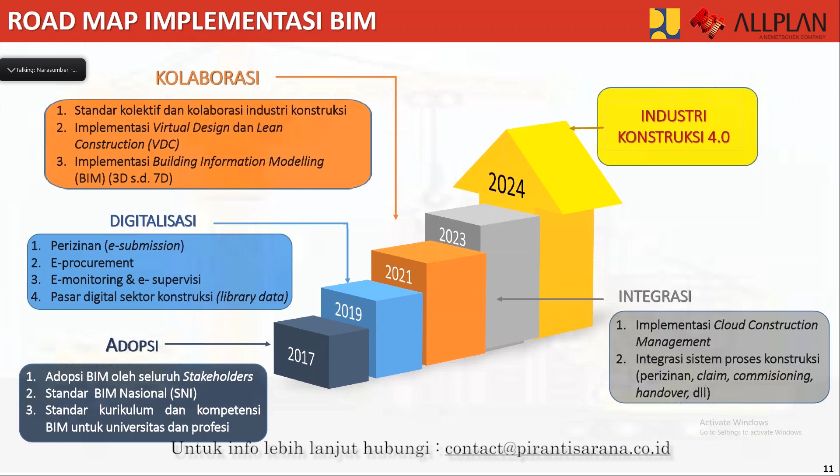Roadmap BIM seperti apa yang sudah disusun Kementerian PUPR seperti ini: 2017 adalah fase adopsi, 2019 digitalisasi, 2021 kolaborasi, 2023 integrasi, dan terakhir targetnya, cita-citanya 2024 itu industri konstruksi sudah 4.0. Walaupun ada yang sudah tercapai, ada yang masih meleset, tapi sampai saat ini sudah sangat masif sekali Kementerian PUPR khususnya untuk melakukan ini di mana-mana, kita bekerja sama, berkolaborasi, sudah menggurita kolaborasinya. Nah salah satu yang paling utama yang perlu di-highlight dan diketahui oleh Bapak Ibu serta webinar kali ini adalah ini.

Kami dari Kementerian PUPR sudah mengeluarkan Peraturan Menteri PUPR nomor 22 tahun 2018 tentang penggunaan BIM wajib diterapkan pada bangunan gedung negara. Sekali lagi diterapkan pada bangunan gedung pemerintah, negara, atau yang dibangun dengan APBN, APBD, yang bentuknya tidak sederhana atau kompleks, dengan kriteria di atas 2.000 meter persegi dan di atas 2 lantai. Ini diwajibkan untuk penyedia perencana, untuk konsultan perencana diwajibkan di lampiran 4 di peraturan ini.

Nah, keluaran-keluaran yang diminta dari peraturan ini apa saja? Ada 6 keluaran atau deliverables-nya, yaitu gambar arsitektur, struktur, MEP, landscape, RAB, dan BOQ. Jadi ada 6 itu yang diminta dari peraturan ini. Itu silakan dibaca aja di download peraturannya. Sudah diwajibkan ya Bapak Ibu.

Nanti untuk proyek jalan jembatan bentuknya gimana Pak? Itu nanti juga akan menyusul. Yang paling dekat ini, jalan jembatan akan dikeluarkan regulasinya tentang kewajiban menggunakan metode BIM di proyek jalan dan jembatan.

Bapak Ibu, untuk mempercepat implementasi BIM secara masif, kami berkolaborasi dengan banyak mitra, baik masyarakat, bisnis, industri, akademisi, maupun pemerintah pusat dan daerah. Yang paling masif belakangan ini adalah capacity building, pembinaan melalui pelatihan, webinar, seminar offline, Bimtek, TOT, dan seterusnya. Itu yang paling banyak dilakukan Kementerian PUPR untuk memasifkan BIM.

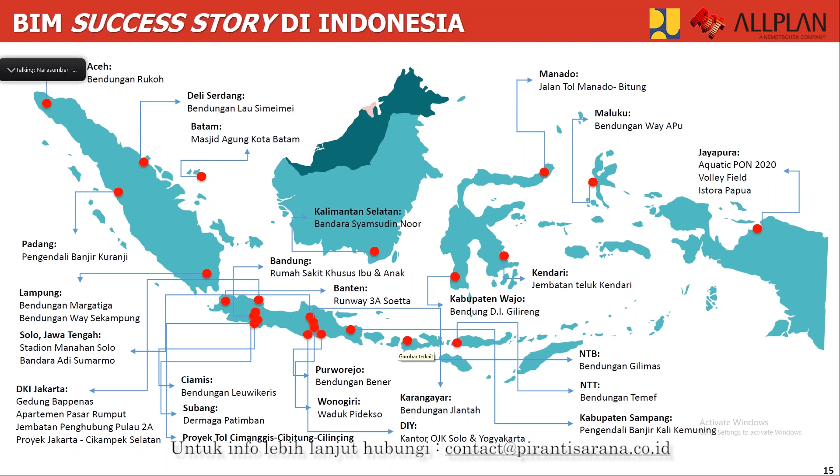Kemudian kami juga melakukan banyak kegiatan pembinaan ke seluruh Indonesia bekerja sama dengan perguruan tinggi untuk melakukan pelatihan-pelatihan terkait BIM. Seperti sudah saya sampaikan, dari laboratorium BIM targetnya 1.000 orang per tahun gratis, tapi lokasinya di Jakarta.

Untuk orang yang di luar Jakarta, silakan datang ke Jakarta, tapi ongkos dan penginapan ditanggung sendiri. Kami hanya pelatihannya gratis dan konsumsi juga dikasih selama pelatihan.

Tapi supaya bisa menjangkau lebih banyak saudara-saudara tanah air di manapun berada, kita membangun kerjasama satelit dengan perguruan tinggi. Perguruan tinggi yang punya lab BIM atau lab komputer, diinstal software BIM, kemudian orang-orang pelatihan di situ bareng-bareng dengan kami. Jadi kita menyebutnya mitra satelit BIM.

Kemudian selain perguruan tinggi, kita juga bekerja sama dengan provider, dengan badan usaha kontraktor, misalkan Adhi Karya yang punya Adhi Learning Center. Ke depan kita akan kerjasama dengan mereka, nanti peserta bisa belajar di Adhi Learning Center, instrukturnya pengajar dari Adhi Karya, kepanitiaan dan sertifikat dari Balai Penerapan Teknologi, dan guidance materi secara umum dari kami.

Jadi kita sudah banyak bekerja sama dengan macam-macam stakeholder. Kami juga bekerja sama dengan provider yang punya lab sendiri, seperti Cubicost Glodon. Nanti kita juga menitipkan orang-orang untuk belajar Cubicost Glodon di kantor atau lab mereka.

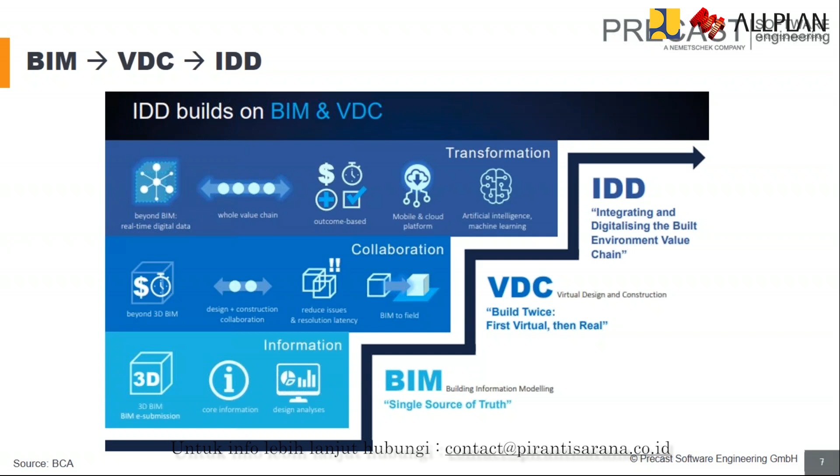For today, we would like to talk more about what is actually BIM in precast systems. Firstly, we have the advanced precast concrete system, whereby you have different principles which have to be adopted for more efficient precast design.

One very hot topic currently is PBU and PPVC, which are prefabricated bathroom units or prefabricated prefinished volumetric construction. This is slightly different from an individual precast panel, and the advantage is quite significant in terms of time saving, safety, quality, and manpower reduction.

One case is that in Singapore we have a project which should have taken 12 months to complete, but with PBU and PPVC, the time was shortened to 4 months. With most of the manufacturing happening in the factory environment, there is lesser chance of accidents on construction sites, and in the factory environment you can control the quality better as well.

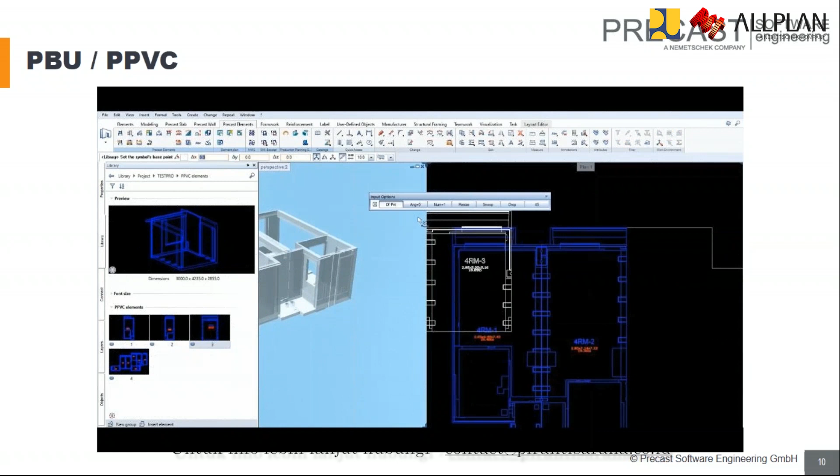And as you can see from here as well, we have multiple different views from 3D to 2D, and I will explain it briefly again later on how this actually helps people to use our software easier and learn faster as well.

So PPVC is actually quite popular in Singapore, and the government is also pushing very hard for this initiative. And for design wise, I think it will be easier because ideally all the components should be standardized more or less. So you can see all the details, and my colleague will demonstrate to you on the interface later.

Another thing that we stand for is actually open BIM. I think this is also one of the hot topics in the industry, because no solution on the market can do every single task. But for precast software engineering, I think we encompass more or less most of the stages in the precast project workflow. So with an open BIM platform, we use the IFC model to achieve interoperability with other softwares, including the more popular ones like Revit, etc.

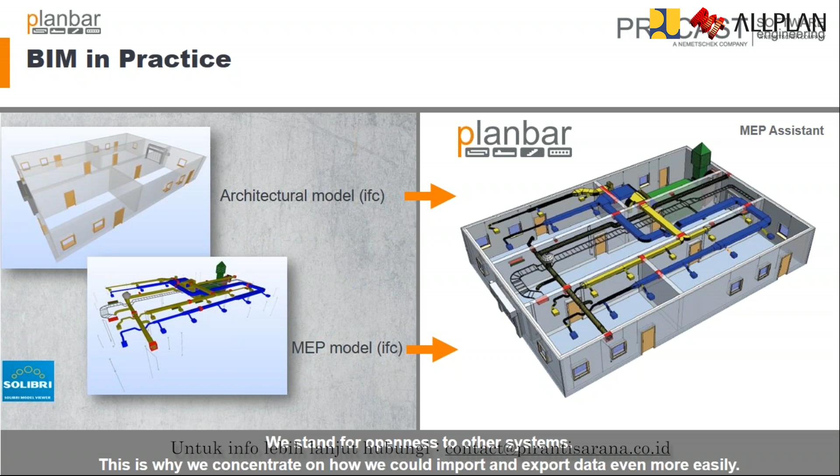So this is maybe a sneak preview of how we import IFC data into our precast model. You can see we just drag the MEP model inside this file, and we can select what kind of openings that we want through this very simple list. Then you load these fixtures or installations onto this precast model, and all this will be done automatically in a very short period of time.

So for this whole video, around 1 minute, we can actually import the MEP model, create openings and fixtures, then create a shop drawing directly from this. And what's more is that we can actually use the data to send to machineries for production. So you can see that all these shop drawings are actually completed just like that. And my colleague will actually show you how easy it is to create and change shop drawings afterwards.

And why we are so integrated - planning is one of our philosophies when we created our software. So we want to make sure all these project workflows run in a very smooth way so that we minimize the information loss from calculation to design to work preparation to production to data and report, and lastly to information management even on a mobile platform.

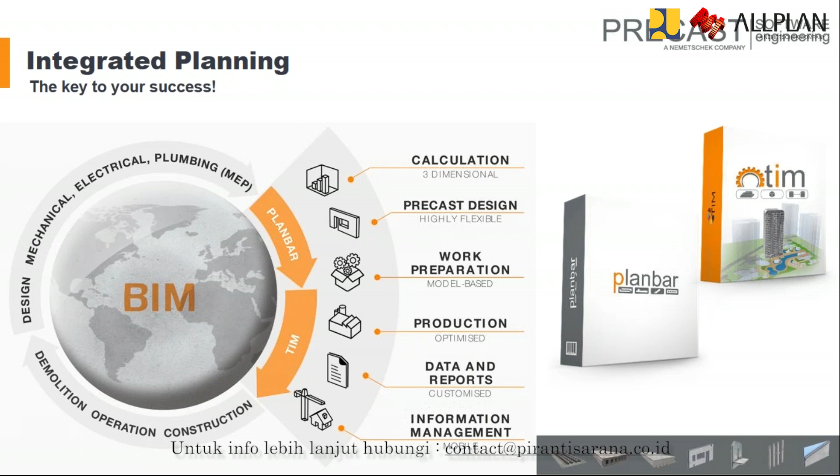And other than that, we also stand for open BIM. So this is actually the benefits that we have with MEP Assistant and IFC Assistant to reduce this data loss when you are doing your precast design.

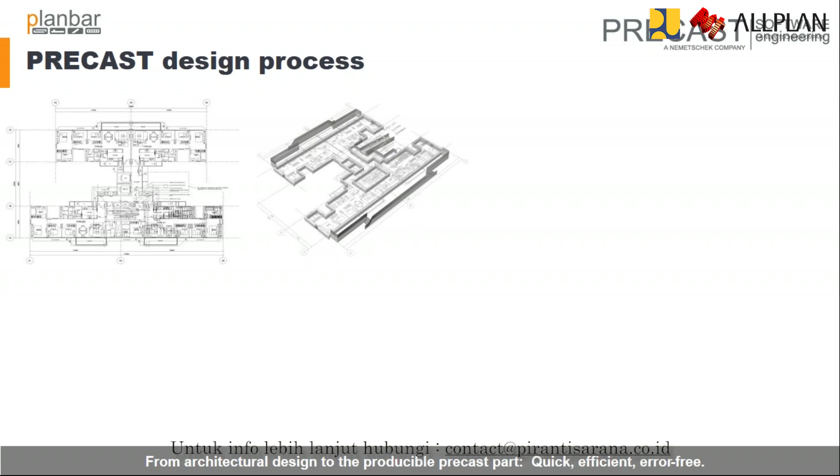The whole process is actually quite simple if you know AutoCAD, for example. So from 2D, you can create a 3D model for the whole, then you can create shop drawings in a very quick, efficient, and error-free way. I think a lot of people, when they create shop drawings or adopt BIM, they do the shop drawing first, then afterwards create a 3D model, which is actually counterintuitive if you think about it.

These are also some of the capabilities that we have. We have a database for some of these more common connections, or you can actually download these connections from the supplier's website and incorporate them into our PLANBAR solution.

Because BIM will consume a lot of computing power, if you think that one precast element may be 5 or 6 megabytes, for example, and when you have 1,000 or 2,000 precast parts in the whole project, and you have over 6 or 10 projects, all this data becomes unmanageable, right?

So we also continuously improve our solution to make it faster, so that it will not consume so much computing power. We also came out with innovative ways to identify similar precast elements in the project, and we group them together to manage them together. So you can change one precast element, and if they are the same, it can be applied to the rest of similar precast elements as well. It will be synchronized and updated automatically, and it will help you to manage this project better as well.

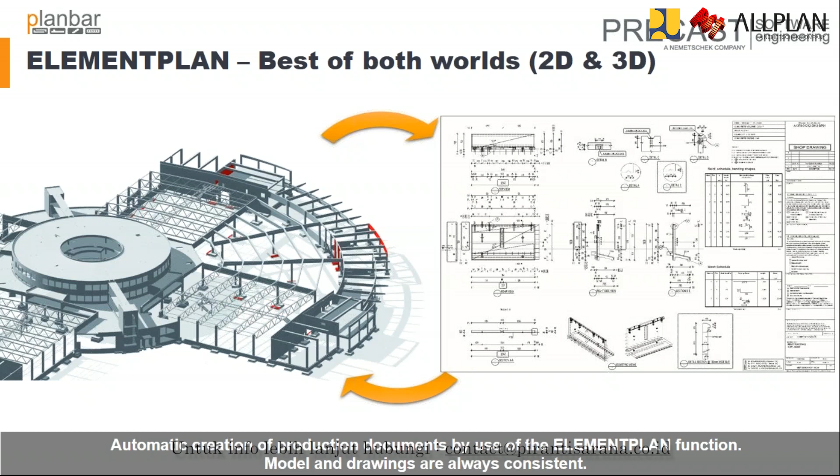The next pain point that we see a lot from BIM modelers is rebar detailing. There are a lot of standards, British standard, European standards, etc., and you have to make sure this rebar is actually compliant with these standards. You have all these different openings, etc., and it would be very tedious to put in one by one.

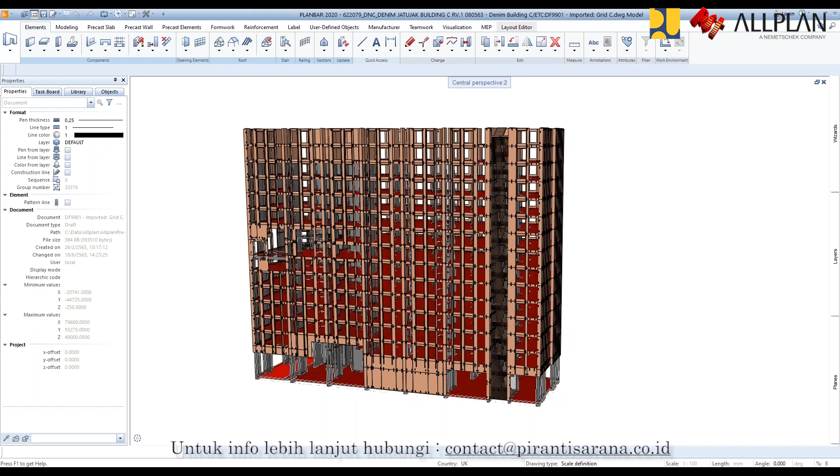Okay, so if you want to make facade wall elements, you need to create the architecture wall first in PLANBAR. I want to create a wall in this area, so let's start with architecture wall. Okay, I just make one wall here with 10 centimeter thickness.

Okay, we have a wall here. From architecture wall, we change architecture wall to the precast wall. We got it already, precast wall.

So in the design window, you can change or input any value that you want to show in your layout. For example, right now the precast type is type LG1, but I want to change it to type LGA. You just type it in the box of the additional attribute, and then you will get the result like this.

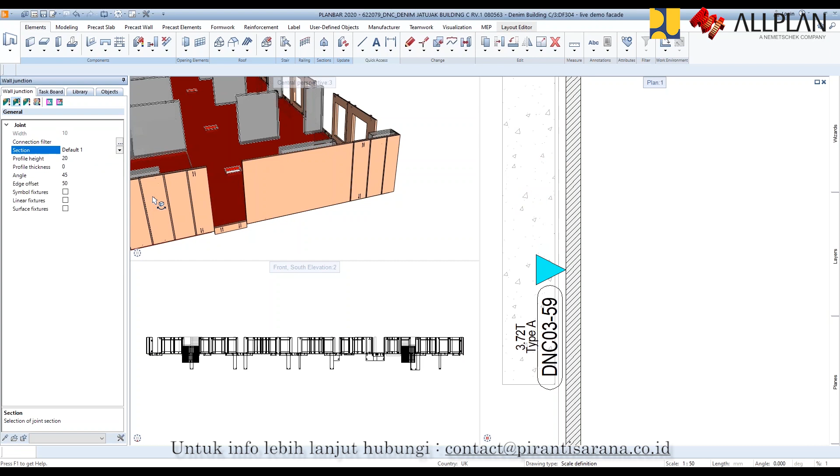So after you have done the design of the precast wall elements, you can use the connections from the design to make a wall segmentation. From the wall segmentation, you just click on the precast wall, and then you can choose the connection that you want to have. And here, yes. And then one more, I want to make a wall segmentation here. Just click on that.

And now you have a new wall with the new name, and of course you can see some information about the weight of each precast wall. It's 1.85 ton right now at the moment.

So from here you can create reinforcement by using basic reinforcement and select precast wall, and in a few seconds you will get the reinforcement. Change some setting here.

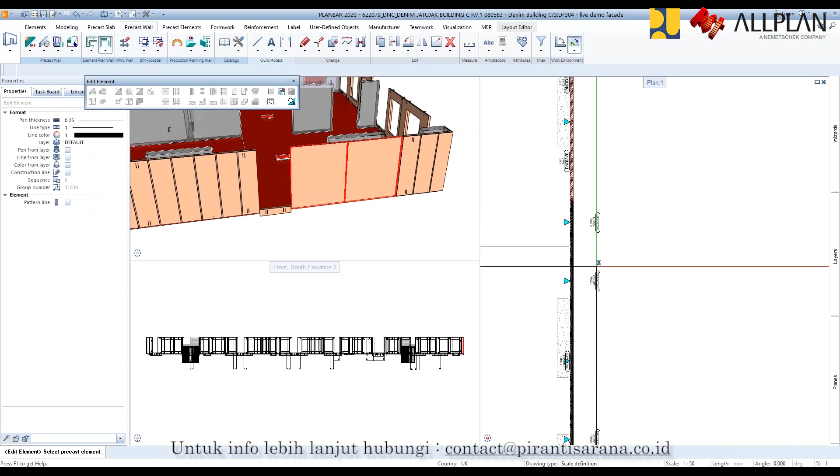And then I want to create some fixture from existing wall element. I can transfer element from existing element by select. And now you get all the objects that you want to have.

And if you want to have the shop drawing, you just click on precast wall elements, and you will get the shop drawing. But with the details of the shop drawing, my colleague Jason will explain you again how to create this shop drawing.

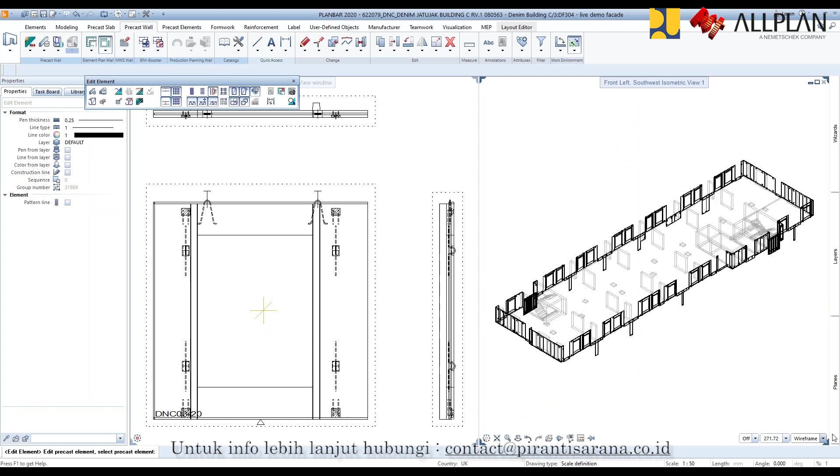And if you want to create some additional elements for your facade wall element, when you look at these facade wall elements, right now you don't have sunshade on the top of the window, right? In PLANBAR, it's very easy to do it. You just go to fixture, then select fixture and draw it. In a few minutes, you will get sunshade on the top of the window.

And of course, if you want to create a connection at the top of the wall or even bottom of the facade wall, we have the possibility to do it in a few clicks. You just select the fixture that you have and you just draw it, and now you get the top key of your facade.

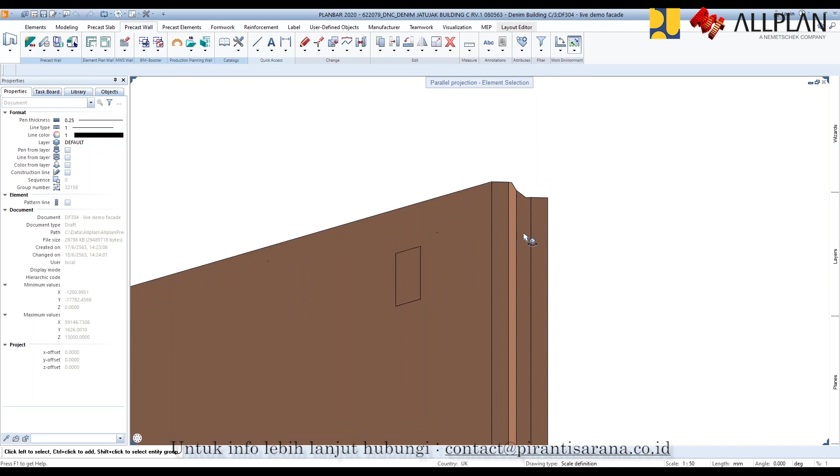And even at the bottom of your facade element. This is horizontal connection for your facade wall element at the bottom, and this is horizontal connection for your top facade elements.

But in case you want to make some opening, we also have the possibility to do it by using cutout. You just use negative and then define the size of your opening and depth of it. Right now, the moment you have the opening, and at any time you can delete it if you don't want to have it.

Okay, but for the facade elements, if you have complexity of elements, you can use our new technology that we call PythonParts. From the PythonParts, you just select the PythonPart that you have in your catalog. That's it. And then you will get all the things that you want to have now.

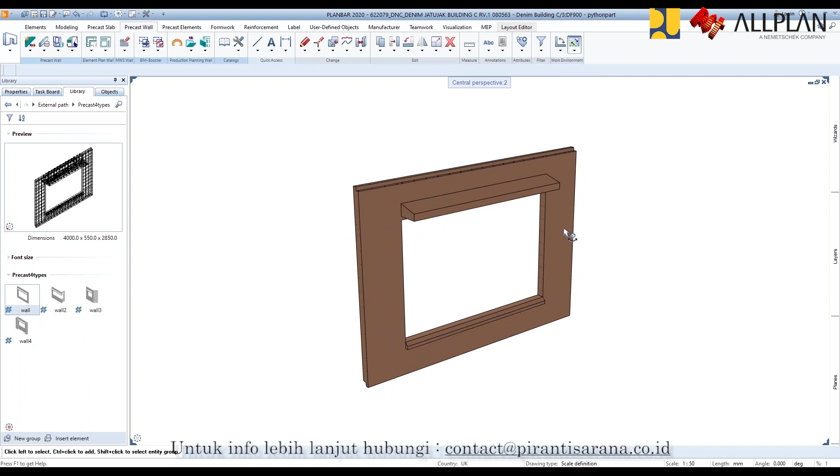But with the PythonPart, it is parametric. So parametric modeling from PythonPart is helpful for you to, let's say, resize your geometry, even the height of your facade wall elements. And of course, you can switch on or off reinforcement. And now you can see when we resize the facade wall elements, reinforcement automatically adjusts according to your configuration.

Okay, let's switch off reinforcement. And for the shading, if you don't want to have shading, you just uncheck the option in your PythonPart. And this is the result of your facade wall element.

And of course, if you want to modify horizontal connection, we also have the possibility to change the type of connection on the top and on the bottom. It depends on your design.

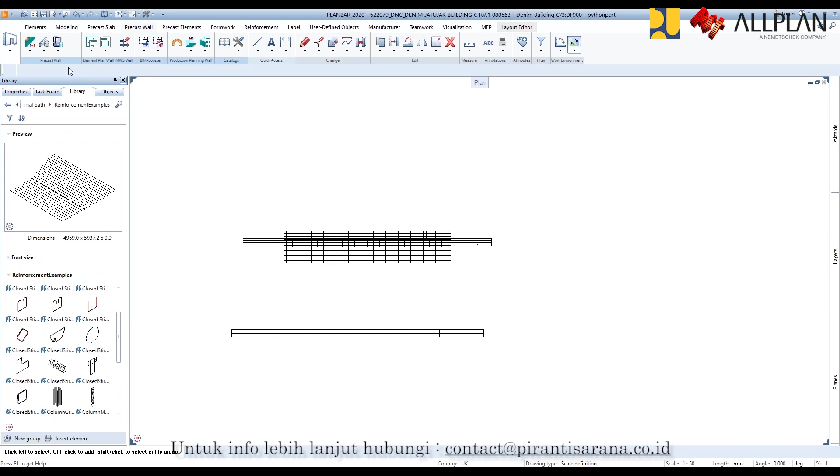Okay, and for the PythonPart, actually it's not just for the facade elements. You can use PythonPart to fulfill all your design. For example, if you want automatic reinforcement, we also have an example of PythonPart in our system for slab, for beam, for column, or for T-beam, whatever it is. You can see the example of the PythonPart in our catalog.

Okay, this is the facade wall elements. And the next one, I would like to show you how to create precast wall elements. Okay, let's start with the PDF file.

Imagine if you want to build up 3D modeling from 2D, and sometimes you don't have a DWG file from the designer or owner. Mostly you get a PDF file, right? So with PLANBAR, we are really open for the technology. We can drag and drop PDF files and then select the number of the page you want to import. Let's say number 3. From page number 3, now you get the data from PDF in PLANBAR.

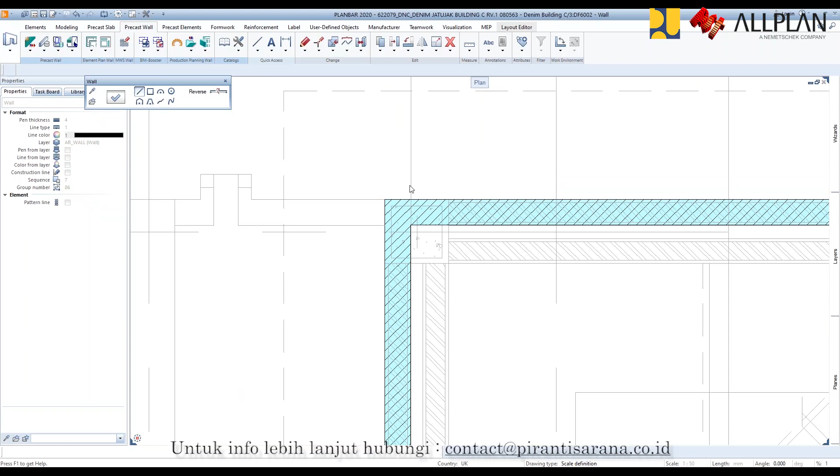So we just assign the PDF as the reference because we want to build up the wall. How do we create a wall? We just want to create the wall here and here and here and here. Sorry, is something wrong? Is that the middle?

Okay, I just move it if something is wrong, but it's not wrong right now. Let's say I have done one outer wall at the moment, and for the inner wall, of course you can draw it again, but I can mirror it from the existing wall here and here. If there are some clashes between two walls, it appears in yellow — you just delete it.

Okay, and now we have done the wall, and if you want to create some window opening in PLANBAR, it's very easy. You just go to window opening and define the height of the opening in the properties window, and then I would like to have our opening for the window here. I just click on it, and I need 1000 from the left, and width of opening 1080, height 1800. Yes, now we get the opening here.

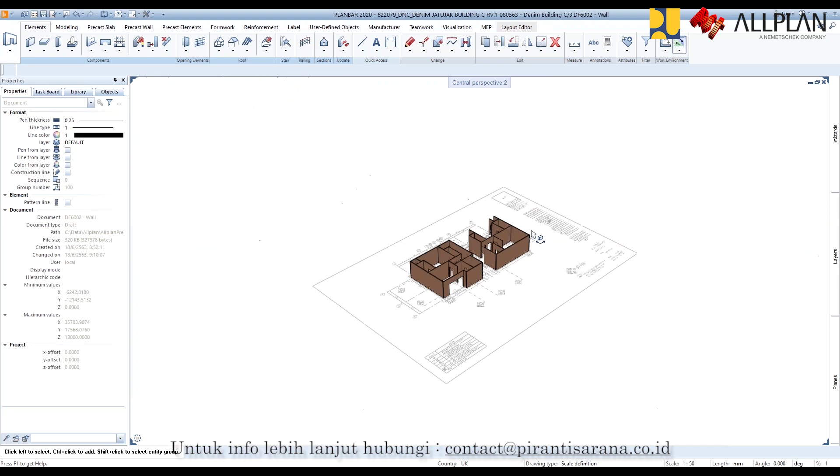Okay, let's say I have done the precast wall, and now I want to make precast wall elements. I just go to design again, and from the design I have to select precast architecture wall. In a few seconds, you will get the precast wall elements.

And you can modify the mark number. If you want to start the first mark number from 101, you just change the label mark number to 101, and then the first wall will start from 101. And of course, in additional text, you can customize any additional text, from W to WA with dash, with any symbol that you want to show. It's not fixed for the information showing now on screen — if you want to customize any information showing in the layout, you can do it on your own.

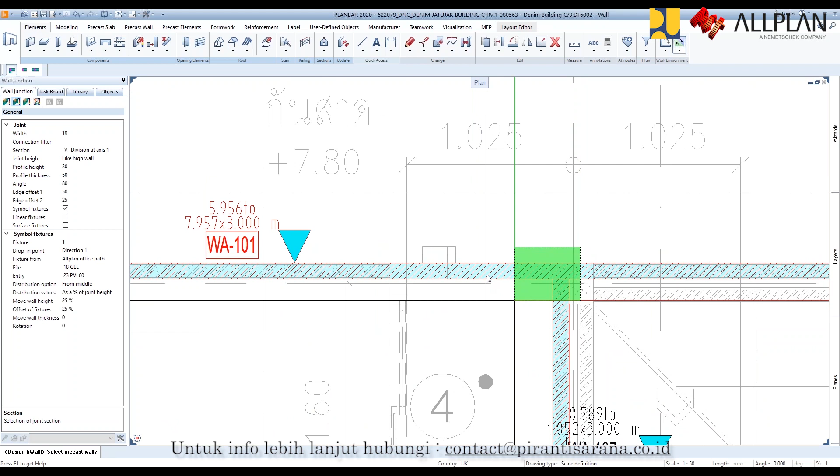And the connection here is not fixed, it's parametric. Let's say, for example, if I want to have a connection here, this is actually the three directions of connection, and you can see now we have 3 weld loops. If I want to have 4 weld loops, it's very easy because it's parametric — you just select and change the offset to 20, and now you get 4 or 5 connections, depending on your parameters.

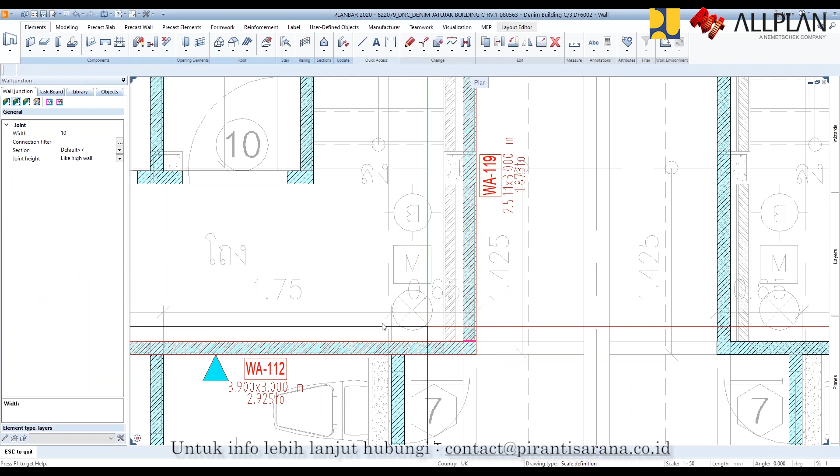Okay, and in case you want to make a wall segmentation here, you just click here, and of course you can change to this type of connection. Don't worry about your standard — for any type of connection that you have in your design, you can adapt it using PLANBAR, because our solution is really open for you to customize anything you want to do.

And then after I have done the connection for the wall, I go to basic reinforcement. From the basic reinforcement, I want to create reinforcement with items such as lifting bolts, corrugated pipe, wire mesh, or attached reinforcement. I just load my preset — from my preset, select Precast Workflow. In a few seconds, PLANBAR will generate reinforcement with any items that you need to have.

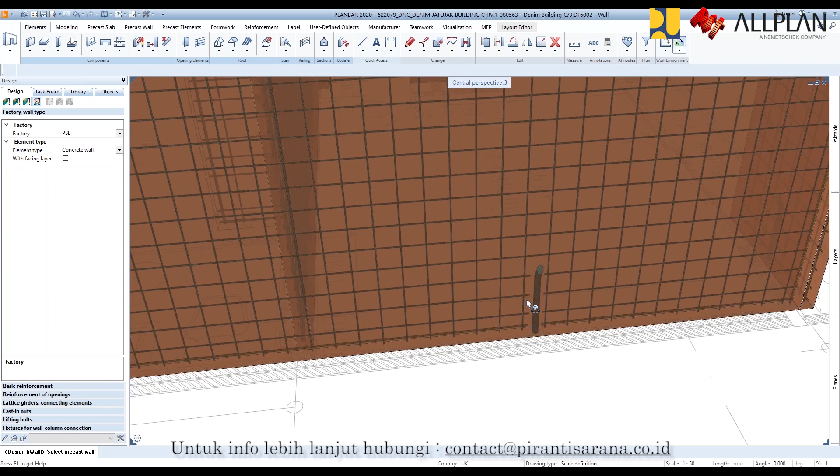You can see now, in a few seconds, you have lifting bolts, reinforcement, corrugated pipe, and of course you can set a loop. If you have a fixture or items here, the system will automatically cut reinforcement. It depends on you, we are really open for that. If you don't want to cut out reinforcement because you have a fixture or items here, we are really open for you to customize it.

Okay, what happens if I come back to the design again and go to connection, because I want to create a connection here. I create connection again, and now you can see the system will automatically create new reinforcement with the two different parts of the wall where we created a connection.

If I come back to model view again, from the model view, if I want to have some opening, now you can see what happened. The system will automatically generate extra reinforcement around the opening, and of course reinforcement also gets cut out because you have an opening here. In case you have to resize openings, you can see what happens after this.

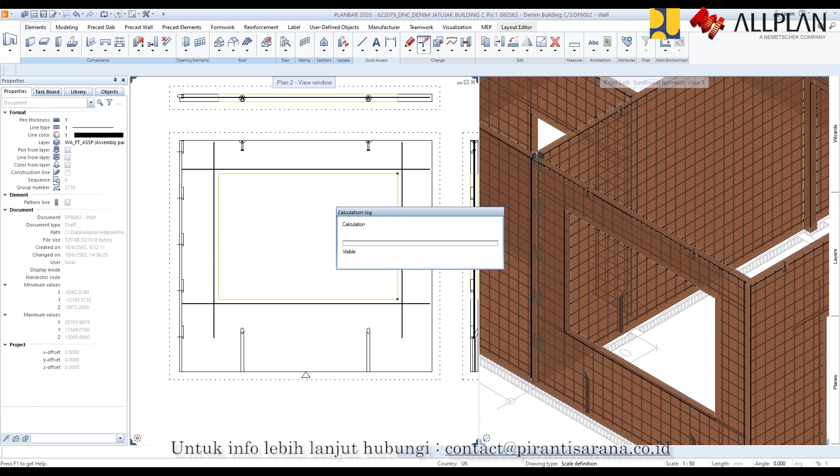The system will regenerate the position of the lifting bolt according to your CG, even the extra reinforcement already moves. Position of the connector already moves because of your condition. So for the precast wall, we have a more automatic system to help you increase your productivity.

Let's say, for example, if you want to build up the 3D modeling, we have a better tool for you to use. Okay, that's all for the precast wall. But not the last, because for the precast wall, it's not just a concrete wall. If you want to create a double wall system, sandwich wall, thermal wall, and wall consisting of n layers, we also have a solution. It's not just concrete wall available from PLANBAR at the moment. We have various types of precast wall that you can use from PLANBAR.

Okay, the next one is I would like to show you how to create a precast slab. To create a precast slab, I switch off the PDF and open just our precast wall.

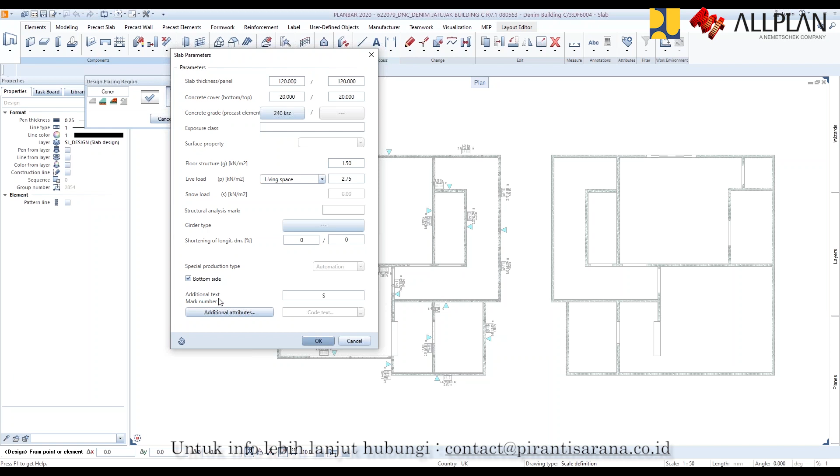When you look at the design of precast slab, we also have various types of slab: half floor, hollow core elements, pre-stressed hollow core, concrete slab, and so on. So let's start with the concrete slab. From this concrete slab, you have to define the thickness of your slab, define concrete grade, covering, and everything you want for the precast, even additional text for the mark number. And of course, you have to define connection or connecting between elements.

In case you have bend bars, like the joints between elements, you can also predefine them at this window. Okay, let's start with the basic slab. For the basic slab, I just click on this area, and now you can see we have a slab already. When I say okay, you will get all the things that you want to have.

For example, connect joints between elements, lifting bolt for the slab, and reinforcement. Now you can see on this side there is no joint because this is the end face, for the wall. If you want to modify it, you just select this side, and from here you can define a joint. When I say okay, now we have a joint here.

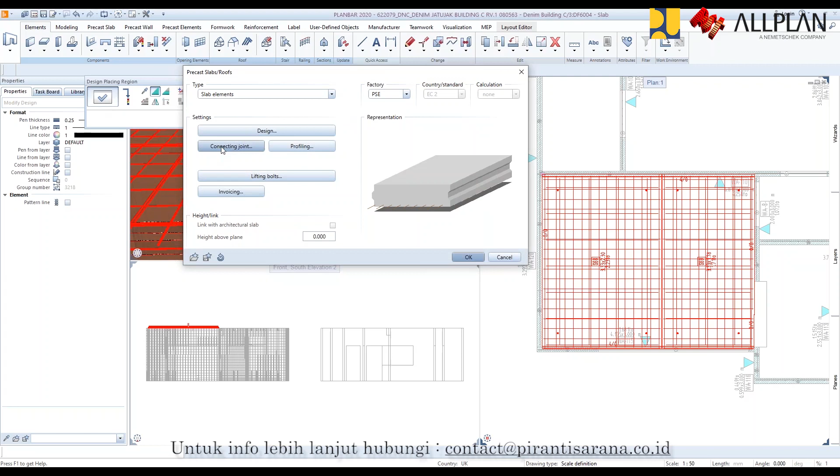If you want to have a different shape for the connection, our solution is also available for you. You can choose whichever is fine for you, but don't forget to assign any value for any bending shape, otherwise you will not get any result.

And when you're asking about end connection on the left, on the right, and on the longitudinal side, you can also have it. I just go to design again, and from the design I go to bar projection. From the bar projection, I load the setting for the bar connection, and then I say OK. Now you can get bar connection at the end face, from the start to the end.

Okay, and if you want to modify reinforcement, you just go to design and select the reinforcement you want to change. For example, I want to change from 24/10 to 20/10, and then I just say OK. The system will update the reinforcement for you with any joint detail.

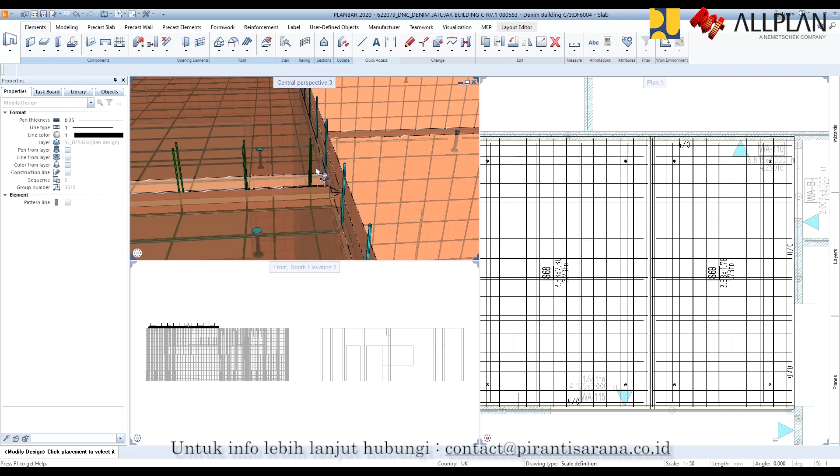And okay, when we look at slab segmentation, if you want to resize your slab segmentation, you can use this function to make a new slab segmentation. Just click on it and escape, and the system will generate a new slab segmentation.

And of course, you can modify support as well. For example, if I want to make the support longer than a wall, firstly I have to make a support separation. After I make a support separation, I click on this support, and support width should change from 4 centimeter to 20 centimeter, and then I'm OK. Now you can see the support is already extended from the beginning around 20 centimeters.

When you want to have some opening on this slab, when I want to make some opening in the middle of the slab, I just make it, and then the system will automatically cut out reinforcement, even changing everything as you preset before in your catalog, in your configuration.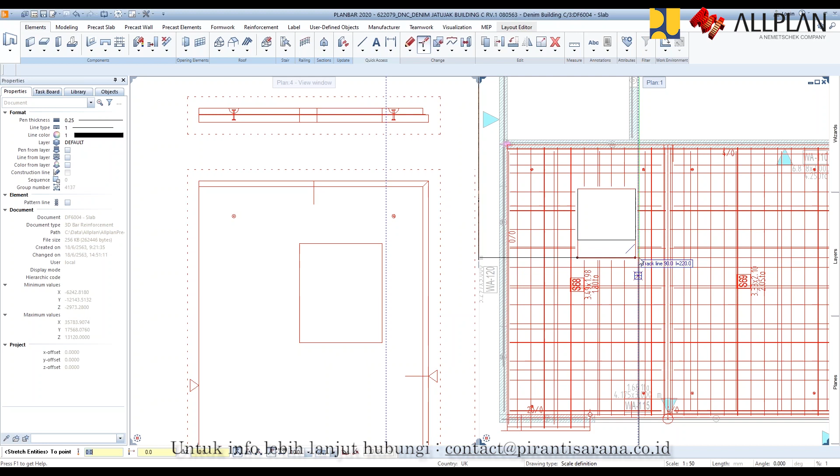And of course, extra bar openings are also available, but I'm not showing that in my setting right now. When you move something, let's say move or resize, it's also updated automatically. And you can copy an opening from this slab to this slab as well.

And if you want to resize your slab, you can do it easier by using stretch entities. And in case you want to change the thickness of the slab or whatever it is, you just go to design, change parameter, and this is the parameter for slab thickness. You can change it at any time that you want.

And on the other hand, if you are not fine with this slab direction, you just go to span direction. In the span direction now, I want to go to 0 degree. And then I go to set fixed point, make element division here, and say okay. So you can see now our solution makes it very easy to do the modifications and update everything for the slab.

For example, opening - I just delete the opening and the rest will be updated. And if you want to copy it, it's really easy actually. You just copy or mirror, and now you will get a slab like this.

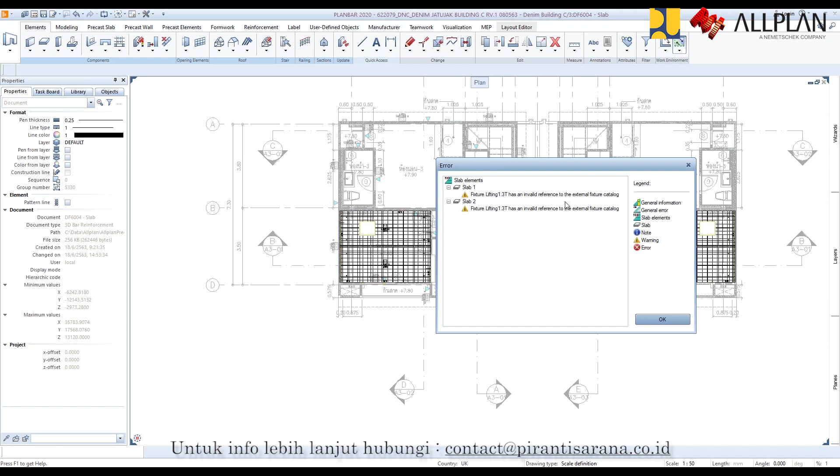If you are not fine with this, you can again change the slab segmentation easily by clicking, and of course you can change the starting point. But at the moment, width of the half set is over limitation. I just delete it and create a new slab segmentation here. Okay, that's not fine actually - let me change the span direction to here. It should be fine now, and then I say okay.

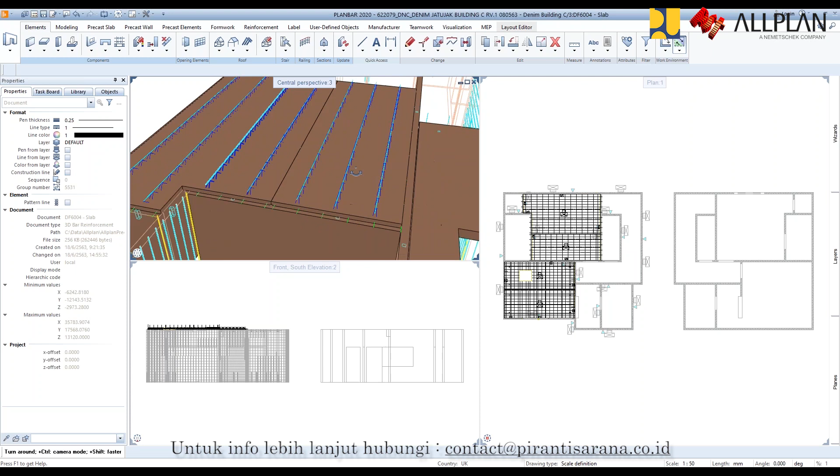And what happened? You can see now we have a half slab with wire mesh at the bottom, and on top of the wire mesh we put the girder, right? And for the girder, you have the possibility to move it manually if you want. This is after, and this is before.

Or you can go to modify design, and from here you can go to lattice girder, and lock the spacing of the girder. Let's say for example standard is 40 centimeter or maybe 60 centimeter. At the moment I need 20 or 200, because I'm working in millimeters. And then I just say okay and okay, and now this is the result of the girder.

It's the same actually as with the concrete slab. About opening - if I want to make an opening here, the system will automatically generate or cut out reinforcement with the girder. Even if you move it, it is the same. This is because of the minimum length of your girder that cannot be produced by the machine, that's why our system will not create any girder here.

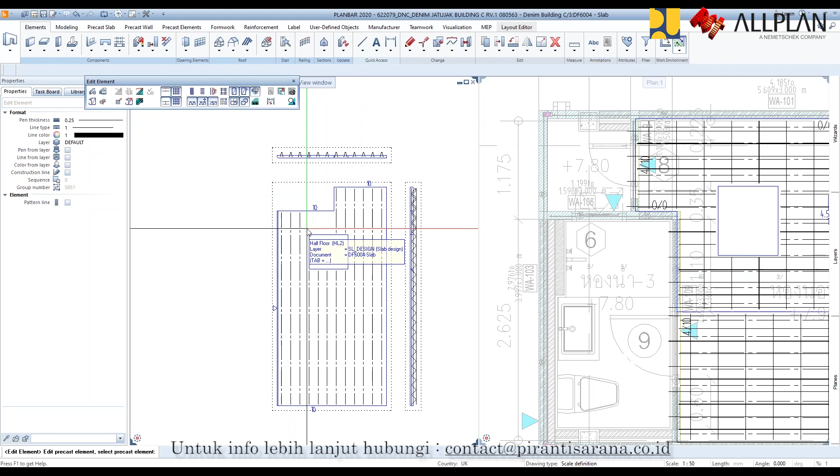But you can make a manual secondary girder by using secondary girder. But at the moment, I'm not showing any more regarding the secondary girder.

And the last one from my side at the moment is hollow core. When we talk about hollow core, normally you have machines to produce or create a hollow core slab element. With the hollow core slab elements, when you look at the type of hollow core, you can create any type of hollow core that you want to have. I will go a little bit deeper into the detail of configuration of hollow core.

If I go to hollow core, you can customize your profile of your hollow core. You just have to define parameters - let's say, for example, panel thickness, number of cores, and even the standard panel width, minimum fit panel width, and so on. So after you have done the catalog for your hollow core, to make a hollow core in 3D, it's very easy actually.

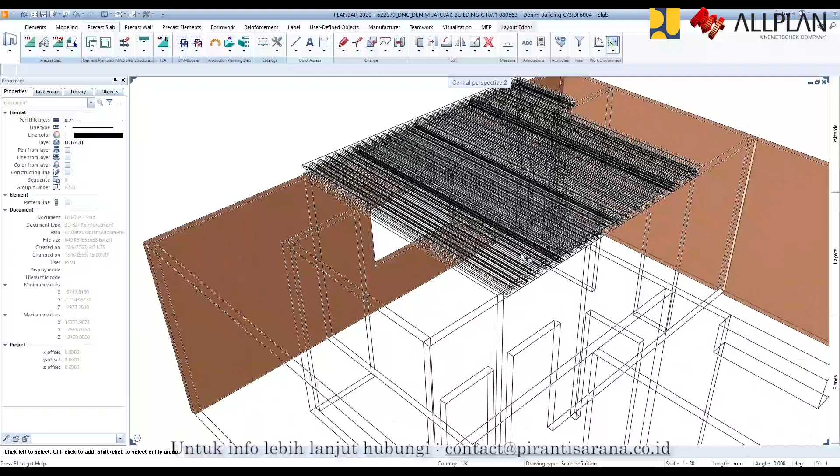It's very easy to make a hollow core system. The cutting will follow the rules or conditions of your configuration, because we don't allow you to cut your hollow core as width of the hollow core, right? But this is not a restriction of the rules, so that's why the system shows the cutting at this area.

It's the same actually with the slab elements. If you want to change span direction, just go to here and change to 0. Even the type of hollow core, you can change at any time. Connecting joints of hollow core is also available.

One more thing I want to explain for slab modules. In the slab module, we have various types of slab, but mostly people ask me how to move up or move down the position, the level of the slab. You just go to height and define it, say I want to move down my slab minus 500. I just put minus 500 here. And then if I don't want to use area detection, I just say no area detection.

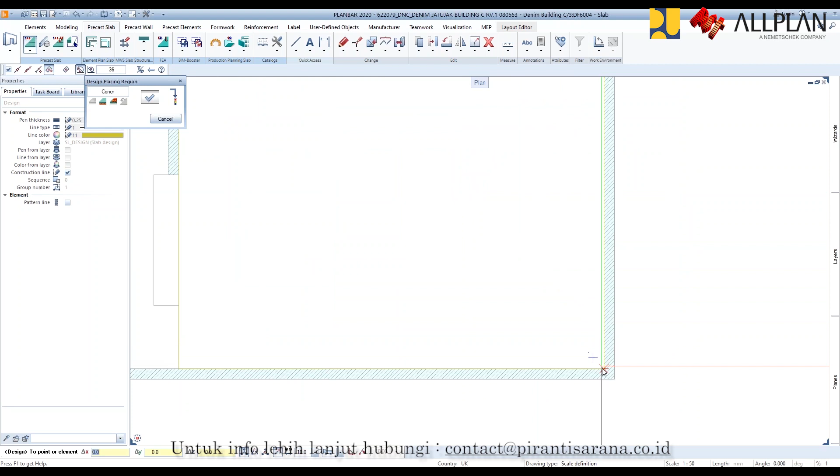And then I go to concrete slab again, and from the concrete slab I just define it. And if you don't want to have any joint, you can do that as well. You just click and say no, I don't want to have a joint here. But at the face, I need it. And now go with 20/040.

Of course, new segmentation, and this is the gap between elements. It's just 1 millimeter, I go with 10 millimeter. Whatever you want, you can set before you say okay. And then I just say okay, now you get all the thing.

Or even the lifting. In the lifting board, we have 3 options available right now: based on weight starting at the center of gravity, or based on panel length starting at outer edge. You can check by yourself how it's working.

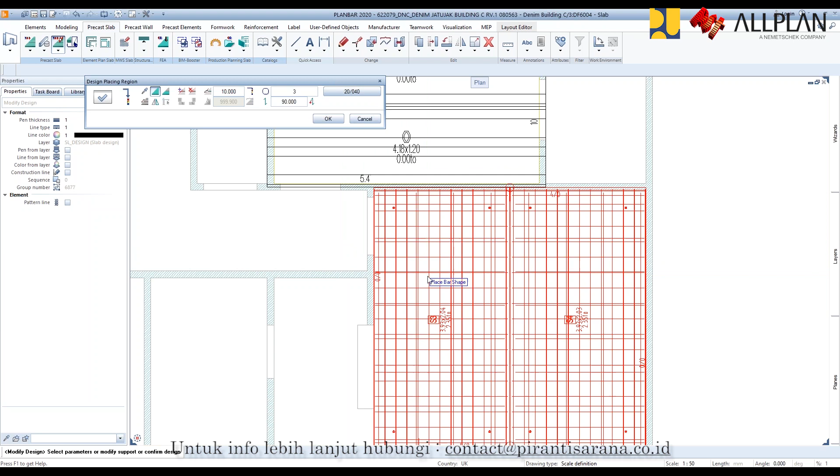Regarding slab elements, if I have more possibility to show you right now. If you want to change steel gauge, you can do it here, and you can even add more reinforcement by using attached reinforcement. You can go to longitudinal bars and crossbar.

And of course, for the shop drawing, you just click on it, and then you will get the shop drawing for the slab. But I will not extend on this anymore because my colleague Jason will take over this part. For the shop drawing, we are very flexible for you to make anything that you want to have.

Okay. So, regarding to the question, do you want to talk something to him?

Because someone is asking for automatic placement for lifting hook, if you're confident to present, then you can show it. You mean for, sorry, the question is, do you mean for wall or for slab, or for both? Okay, maybe I can show you for both. Makes sense to do.

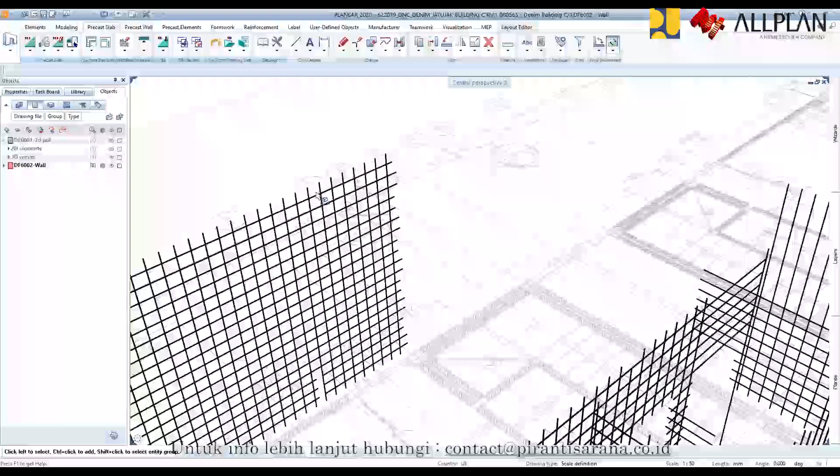I come back to wall. Now you can see this is automatic lifting bowl or lifting anchor. I have to come back to properties, to the basic reinforcement. And then in the lifting bowl, you have many possibilities to set the condition and rules to have the automatic lifting bowl.

And of course, we have automatic lifting bowl, and this is a window where you can set any parameter or condition for your lifting bowl. This is for wall.

And for slab as well, as I showed you, when you go to this, lifting bowl, we have 3 options to get or create automatic lifting bowl. We have option 1, option 2, and option 3. So for the slab and wall, we have automatic lifting bowl, and you can use this automatic system to create your lifting bowl for slab, for example.

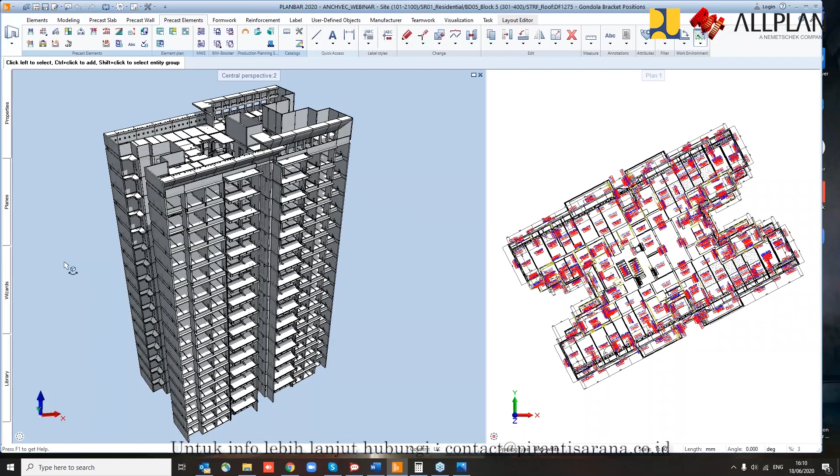So to show you more on the project, a real project, I will open a project. Just to have a background of this project, this is one block of about 10 blocks for one project. This is a project of one of the precasters in Singapore, which is Greyform Private Limited. This is actually an EC, or executive condo, type of structure, composed of 10 blocks and about 16 stories per block, plus basement, edex, and roof. So the PC elements here, as you can see, are actually all precast.

Even the simple ones, as I mentioned, simple walls. You also have, for the lift core area, the ducts and the staircase, etc. So it means the structural precast elements are actually possible to use for any shape.

So I will try to show you that, for example, on this featured roof. It's something like an irregular shape. And if I load the detail of this, then you can see that this kind of shape is really possible to do using the structural precast elements, like this one. As you can see, it's not normal, I can say it's still a complicated one because of the irregular shape.

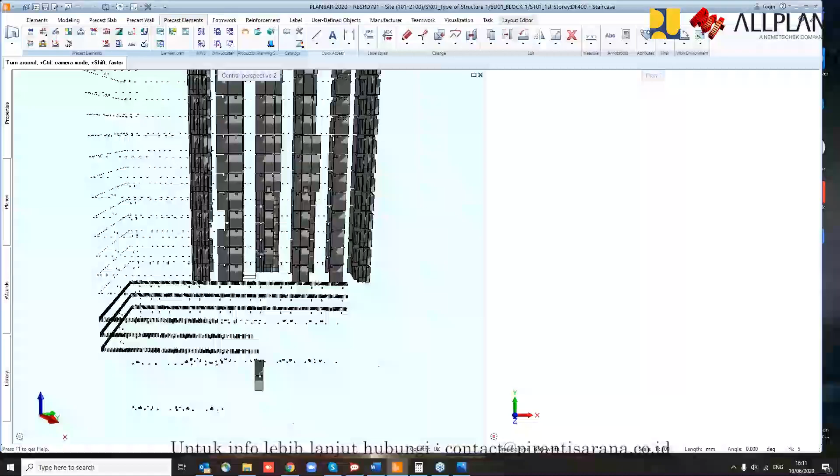The next one is another project from Greyform, wherein you can see other types or kinds of precast elements. Initially I showed you the beams and the columns. So these beams are not just ordinary beams. If we can see, the shape of this is actually a really huge precast element. Even the columns, even these core walls. So if I can just go to a certain level to show you how it looks like.

Because this one is really difficult to produce, normally they use precast elements, especially for irregular shapes. I will just load maybe level 3. By the way, this project is actually a 29-story office development with a 5-story podium consisting of a first story restaurant, second story main lobby, and a 3-story car park. So all of the elements here are actually precast also.

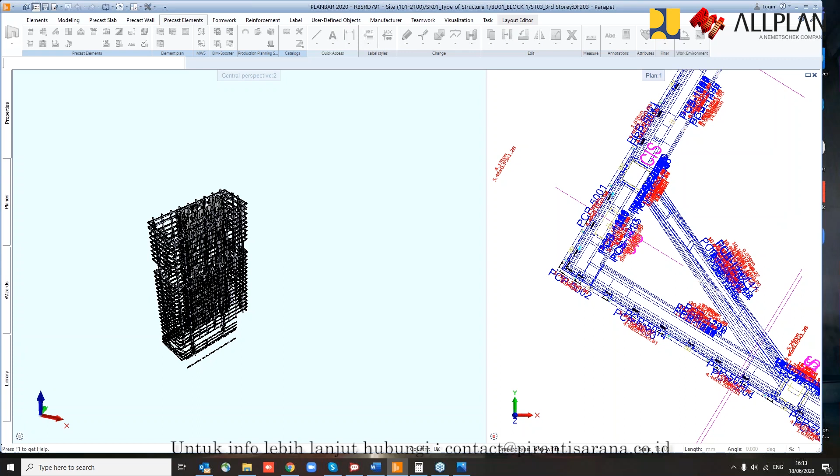So maybe I'll just open this, third story, just to have the dimension. So you can see, just to show you that when you have a huge project with a big or different type of precast elements, you can still use PLANBAR to create them as precast using the structural precast elements. As you can see, there are beams that are almost 9 meters, almost 10 meters, excluding this part. If I show you closer, so this part, it's really a big beam. This beam's depth is about 1.2 meters.

Okay, so now to show you, I will go back to my project to show you how to use the structural precast elements. So again, these are the samples. The PPVC or the PPVC PBU is this one. So how can you use the structural precast elements?

So first, you can do the same procedure as what my colleague showed. If you have a PDF, you can use the PDF to refer. But at the moment, since I will be doing just an individual element, I will just show you how to create a precast element using the structural precast module.

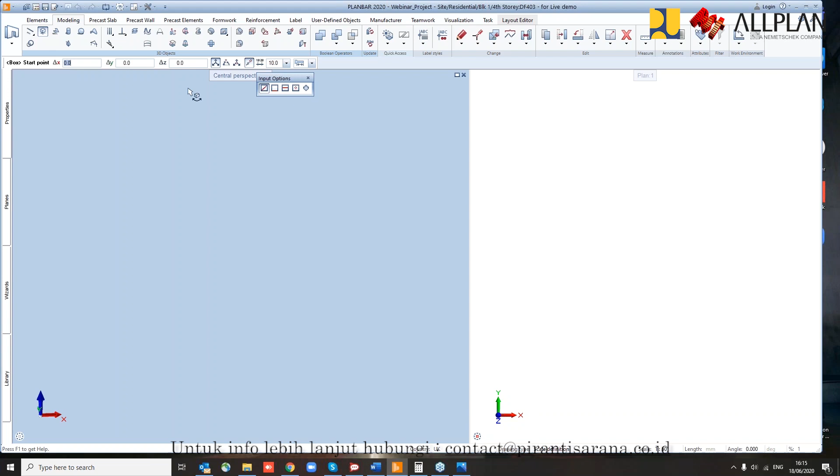First, you're just going to use this 3D modeling, and you can say I will create a 3D object to make a column. So I will specify the dimension of 1.5 by 1 meter and the height of 2.5 meters. Initially, this will be your precast element, I mean the 3D model.

To convert this as a precast element, you just have to go to this precast elements and select this icon, which is the structural precast elements. And I will just load my predefined settings. So you have this properties: a column, 3D, and then PC precast. You just have to fill in all the information here that you need, including the dimensions if you need it. So I will select the 3D element.

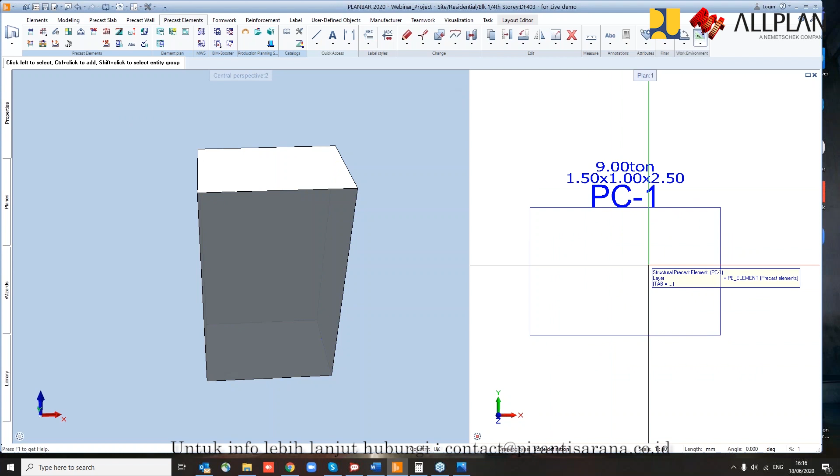Once you have this marking, it is actually a precast element already. So how are you going to cut, or how are you going to make this 3D model to be the same as per the standard? Let's say, for example, I'm going to put reinforcement.

Since this one is a precast, I can already put reinforcements. Basically, I will use first maybe the links. Then, by the way, I can go to create views or edit element, same as my colleague has done.

Or either you can also create a view by your own, so you can have it here to control more. I'm just creating different views: the top, side, and front view. So again, I'll start with placing the reinforcement.

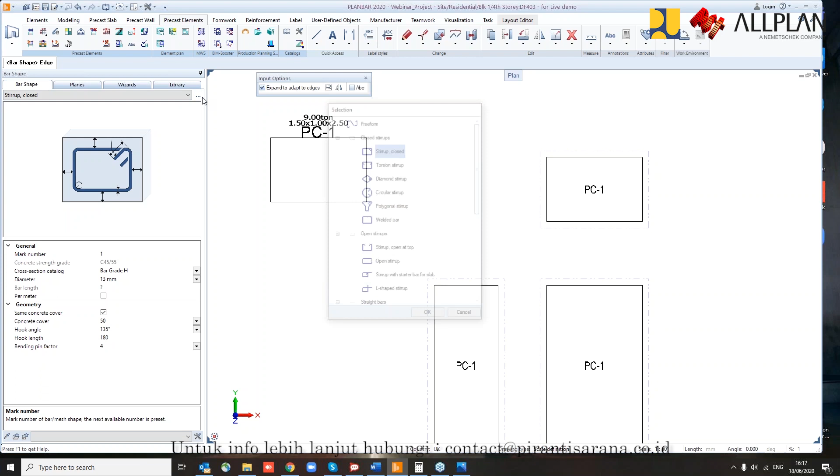Once you have created this 3D object to become a precast element, you can have this reinforcement specifying what types you're going to use or shapes. You have different shapes here. Let's say I will use first the links.

I will just load my preset and say I'm going to place bars here. As you can see, it's adapting the shape, and I can say place bar shape. As you can see, you can have the bars there. But in this case, you can still modify the spacing.

So maybe I just stretched it a little bit. You have the spacing of maybe 150. You can change from this setting, or you can predefine the spacing that you want to have. For example, I want to space from this area to have a spacing of 100.

Then another placing bar from here to here to be maybe 200. So you will have this different spacing for your links. As you can see, it's already inside.

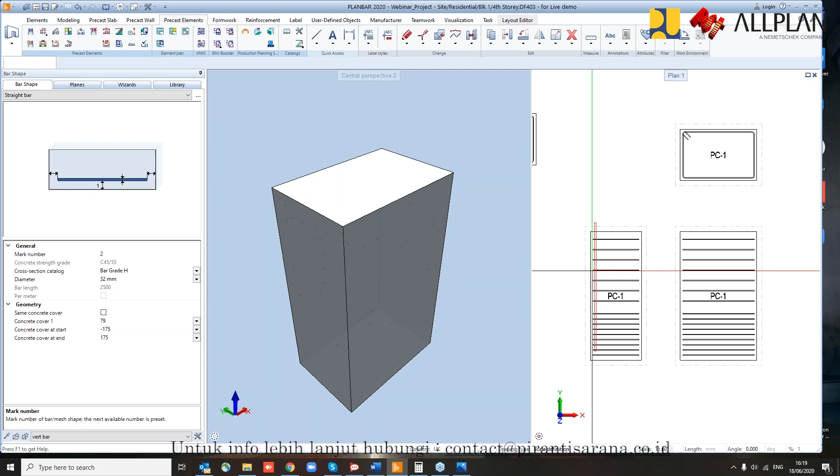Let's say, for example, the straight bar, that's for the vertical. I will just load my preset, and if you look at this, I'm going to check this one in adapting my boundary. So if I click here, I can say my place bar.

It's the same procedure as what we did in the links. I just specify from here to here, and that's what you can see from here. You have the bars there. So we just have to modify the spacing, maybe just to maximize it. As you can see, you can change the bars before you place them, the concrete covers.

So again, I can do one more time for the other side. I just close this one. Okay, again, bars. And just to show you, I will just put this 175, and this one is 175. As you can see, when you modify from these concrete covers, it's automatically adjusting from here. So this will be your guide.

So I'm going to place the same way as what we did. Let's see, from here to here again, and it placed on the other side.

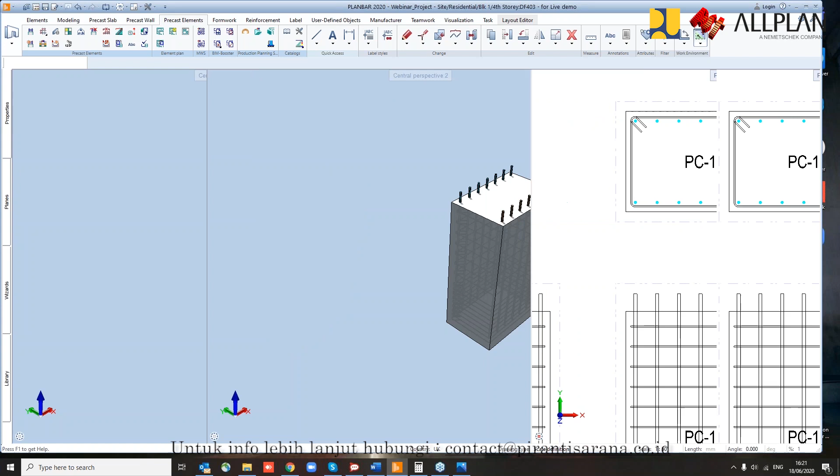So another thing, if you want to put more bars, we can complete this one. Maybe you can just do a mirror since they're already placed. So we can just say mirror from here to here, and maybe this here to here. As you can see from the model, it's already updating.

So the next thing is, actually you can place all different kinds of bars. So maybe we can try to put also the hooks. I just use a form here with a straight bar with hooks. And then you just predefine what will be the setting.

So maybe I can just place my hooks instead of expand to adapt edges. I will just remove that and select just this part and this part. As you can see, I already have the hook shape. You can still modify this if you want to have a longer hook length.

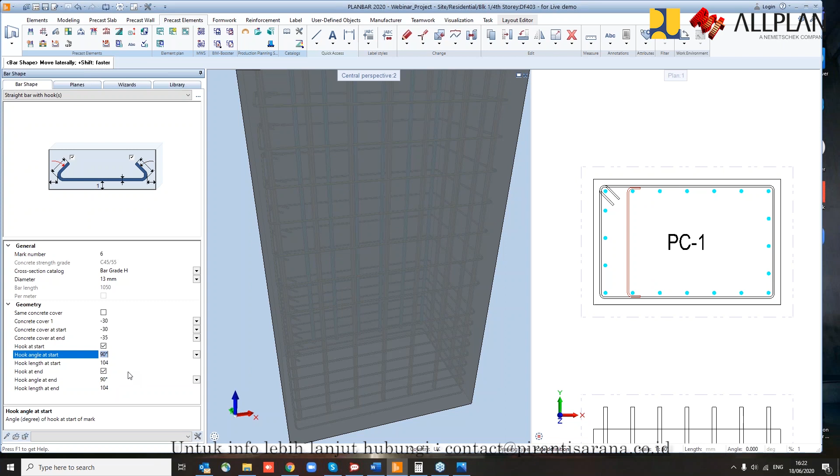You can change it from here, or even adjust the degree. If you say 90, you can just use 90. So it depends on your design standards. Then you get to place again the bars, and maybe I can just say automatic placing of the hooks. So it's really easy to place or create bars using PLANBAR.

Then the next thing I can put is maybe another link inside. So I will just place another bar shape and create the shape of a closed stirrup, and now it's a link for the inside. So maybe from here to here, and this will be the location of my hook. Okay, should be this one.

You can modify again. Let's say the concrete cover from this side is maybe 25. This one will be 32, 25, okay 32, and that should fit in here. Then you can place the bar shape automatically. So you can see from here, I can make it more visible by changing the transparency, so maybe about 49 or 50.

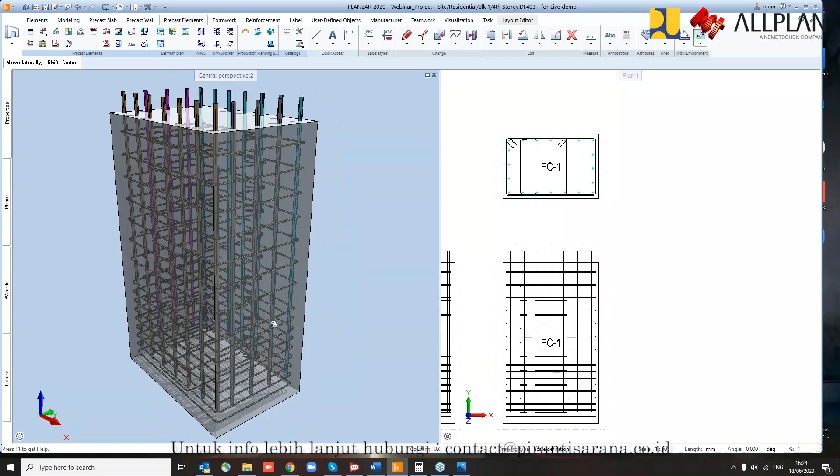Another thing you can do for these precast elements, to make it a little bit more complicated, maybe you can put also some fixtures or a curb on top. I will just put some fixture, like my colleague already shown you. They have some different levels on top and bottom. This is something like to prevent waterproofing issues. So once you have placed that, as you can see from here, you will have this curb.

Again, let's say we put it for the bottom. So we'll just do the same, we place this fixture, and let's see on the top and bottom. So I just press escape and say okay. As you can see, the bottom becomes cut off.

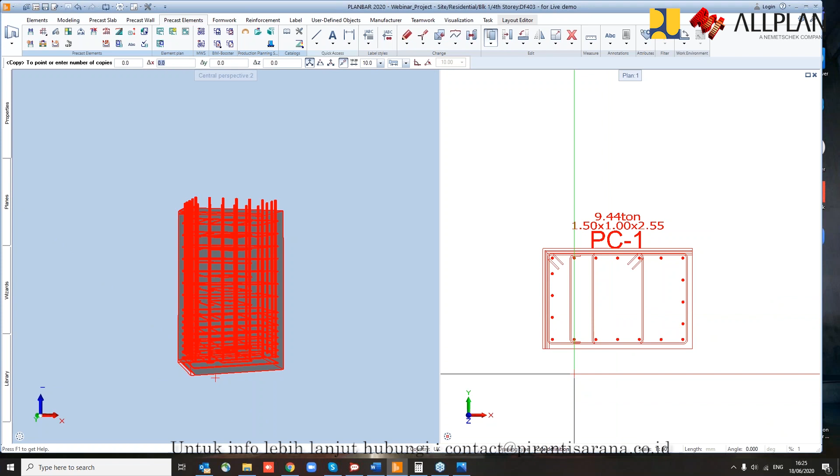So let's say I do a proper demonstration, maybe to see how it looks like. I'll just make it 0 first, and then for your concrete, maybe just a copy on top of it. As you can see, you will have this connection.

So the next thing is, let's say you need to provide a cutout for your slab. Since this is made from a 3D object, or is still a 3D object, you can use the modeling here and then extrude. Let's say, for example, I want to have a cutout from this portion up to somewhere here, and a drop of 200. Sorry, it's additional, so maybe I can cut out again from here, point to point, and it should be on the z-axis, and it should be negative, so 200. As you can see, you will have a cutout here, and it's still a precast.

And let's say, for example, you also have an opening, a small opening, maybe at the middle or somewhere. We can use this again and say a circle. So let's just say I will use this circle, or maybe I have to provide something, but if, let's say, this box, I'll cut out just to have a shape. As you can see, you can have your hole at the middle.

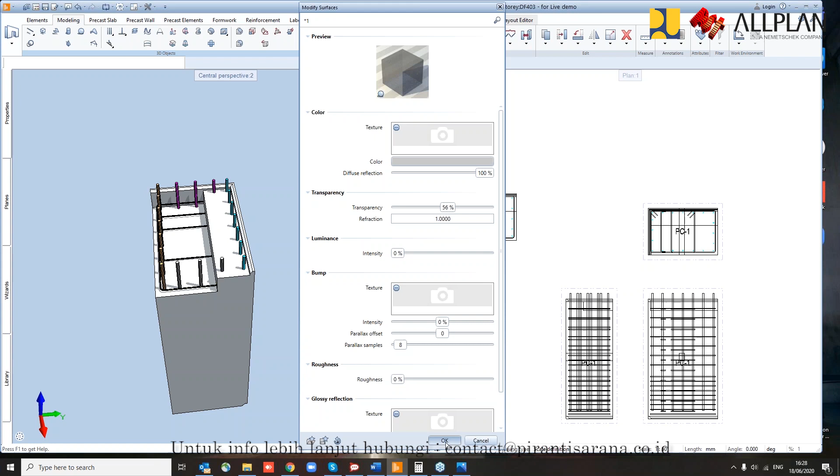Well, basically, because this is a precast structural module and we have placed the bars by ourselves, definitely the software will not recognize if it will be cut or not. So in this case, you need to adjust by yourself according to the openings. If you need to adjust some bars, you have to do it manually by moving it.

The next thing, let's say for example, you need to also put some fixtures. You can easily put them by placing maybe the splice sleeve. And then I'm going to place, okay, somewhere at this point and this point.

Okay, so as you can see, it's inside your bars. Okay, and maybe we can place also the fixture for the lifting. So we can just place it somewhere here and maybe drop a little bit because the part is... again. So let's put it here and drop. Oops, sorry. Okay.

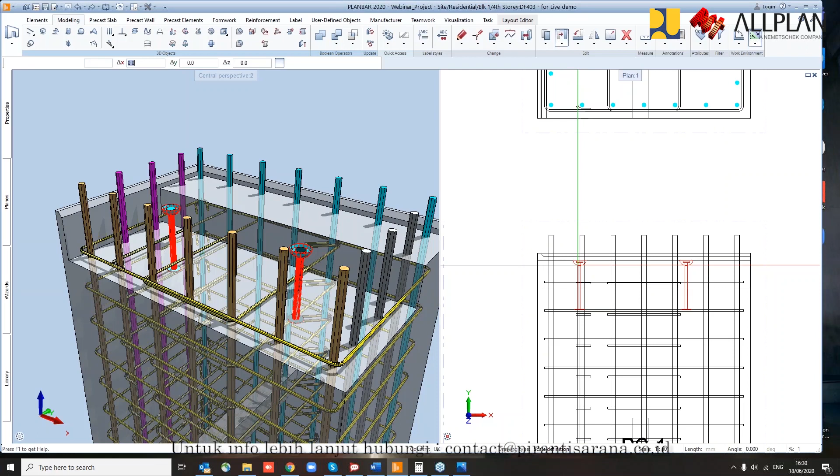And then we can also adjust it from top to maybe about 200 on the z-axis. So from here, z negative 200. Oop. Make it more lower, so maybe just say from here to here. It's actually there anyway. So that's how you're going to create your precast elements.

If you have some other cutouts or openings, then you can just use the same procedure as what I did. We can also use another type of cutout fixture, wherein you can use this also if, let's say, I have an opening from here to here and the height from here to here. So it's possible also that you can use this tool. This one is called a modified precast element.

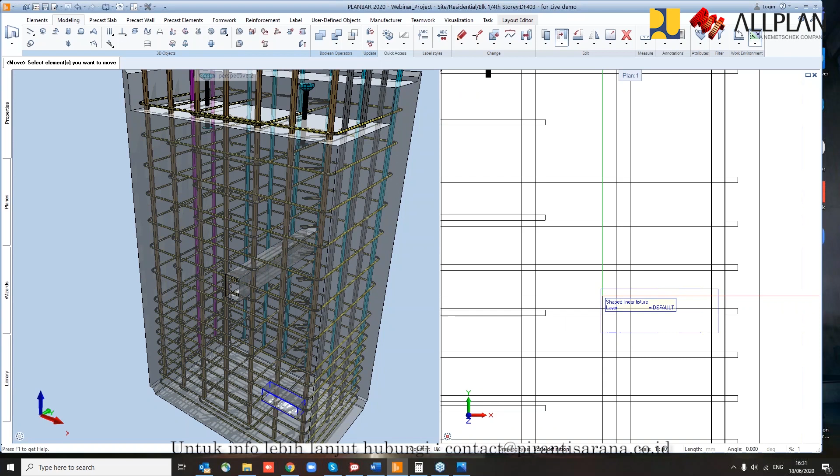You can move this, you can still move it in any place that you want it to be. Compared to this one, it is already directly done using the 3D elements. So what you can do is still movement by stretching, but for the other one, it's not possible to do. It's still possible to do by just moving and clicking this shaped linear fixture, and you can place it anywhere.

So basically, this is the basic workflow that you're going to do when you're going to use the structural precast elements. So after this, let's say you have complied with all the standards for the design of the column, you can now generate the shop drawing for this.

So I have a shop drawing generated from this column with the corresponding bar shapes, as you can see from here. And as I can show you, you can modify the bars. Let's say you need to maybe crank a few. So maybe even if I put the reference here, as you can see, my shop drawing also changed. Okay.

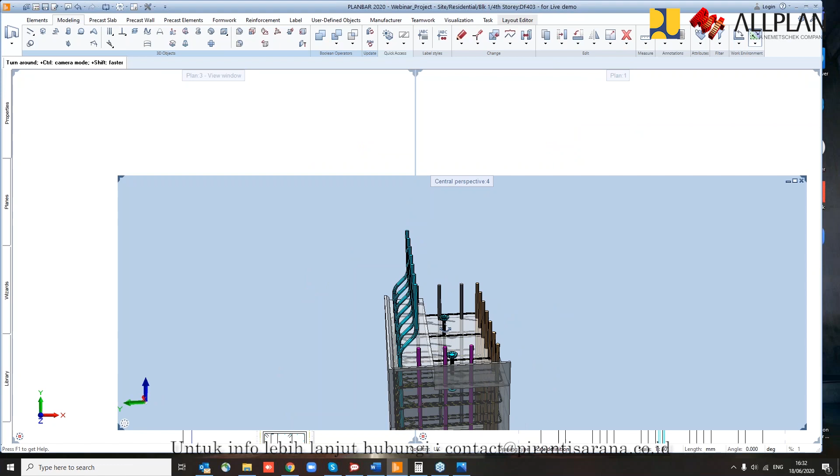And what I can do, maybe just refresh a little bit. And as you can see from here, I have added this bar wherein you have this bar bended. And if I show you the 3D, how it looks like, it's something like this. So it's still possible to modify even after you have created the shop drawing for it, and it automatically updates whether you're working from 2D to 3D or 3D to 2D.

Okay, so that will be just a presentation for the structural precast elements. Now, since we opened up the element plan, I will show you in maybe a few seconds this number of precast elements. So I have different sizes, different shapes, lengths, with reinforcement and without. So if I'm going to generate the precast elements for this, what I can do here, I will just show you how easy it is to generate.

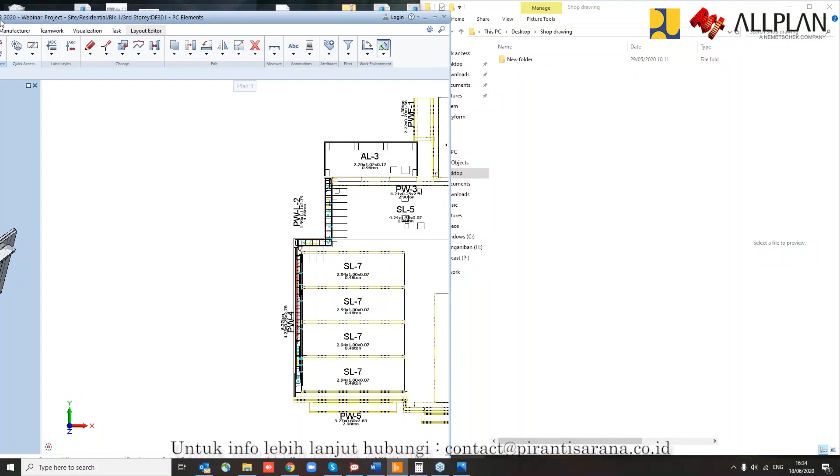So I will just go to shop drawing, and hopefully you can see, just to have a clearer view. So if I go to my precast and use this batch run, and I will just select this, and it's now exporting its element plan. And as you can see from your folder, it is actually automatically exporting each element. Okay, so it's done. I think it's about only 20 seconds.

So if I'm going to show you maybe this one, I'll show you some PDF. So it doesn't matter how big or how small your element or your shop drawing is, PLANBAR is automatically giving you the option to find the proper or correct scale for your drawings. So another one is maybe the longest one. Let's see what will be the... even this one.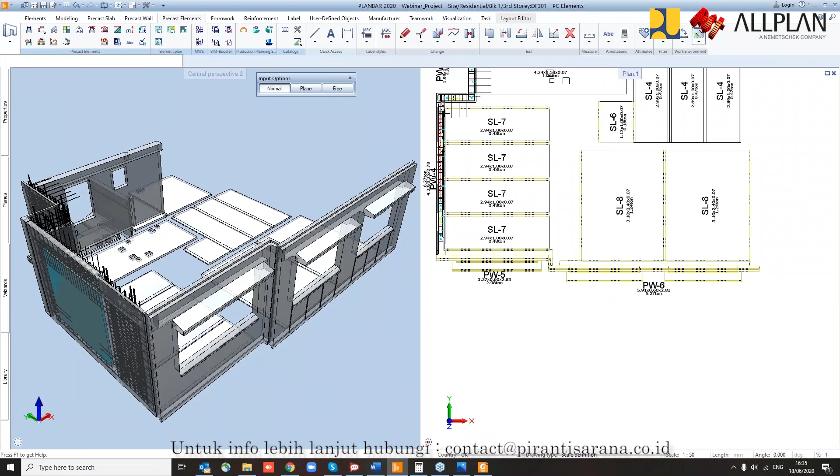So at the moment we don't have any reinforcements. You don't have the reinforcement here. So let's say, for example, we put some bars there. So we go back to PLANBAR, maximize this. So maybe we can have edit element for this and create.

So maybe I can just create also the shop drawing so that it will be easier to see that everything you're going to do from your 3D model or from your shop drawing is actually reflecting each other at the same time. So now you don't have the reinforcement.

So let's try to put some reinforcement. We're going to do the same. We can put just a straight bar to represent it. Maybe just a small bar of 10 diameter. Let's say the concrete cover is maybe just 25. And maybe we can place it here, somewhere here, and then place it from the range of here to here, just to represent that there's a bar.

And once you have placed that bar, okay, what you're going to do is just click on this and say refresh, and it will automatically give you your bar schedule here. Same as with the detail. So let's say, for example, I'm going to put a splice sleeve.

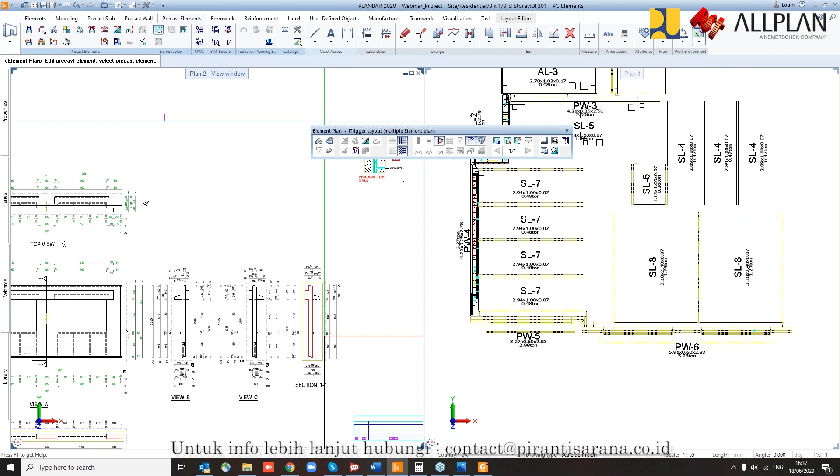And we can update again the element plan, and you should have your detail coming out from there. So even if you move your fixture, you can see from the model also. Let's make it an isometric view.

You can see that whatever you put on your shop drawing automatically adopts your 3D model. So if I move it here, your dimension automatically follows. If I add a few more, as you can see, the dimensions are actually adapting.

So this actually shows you how fast you can generate the shop drawing of any kind of individual, shape, or type of precast elements. Just to give you a background on the setting, since we're talking about the element plan.

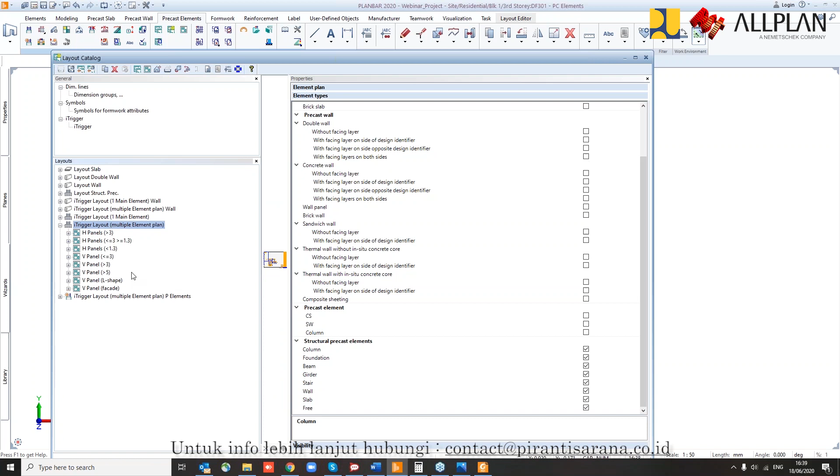So if we go to the catalog, I can show you this setting. I have created different layouts with different scales. So basically, if you have different scales, the software will know what is the proper or correct layout or element plan for every single structural precast element. This is very easy for the program to recognize.

As I have shown you, when we export the shop drawing, it actually takes about 20 seconds to export just these few elements, or maybe less.

Okay. So that will end my topic for the structural precast elements. If you have some questions, you can write them.

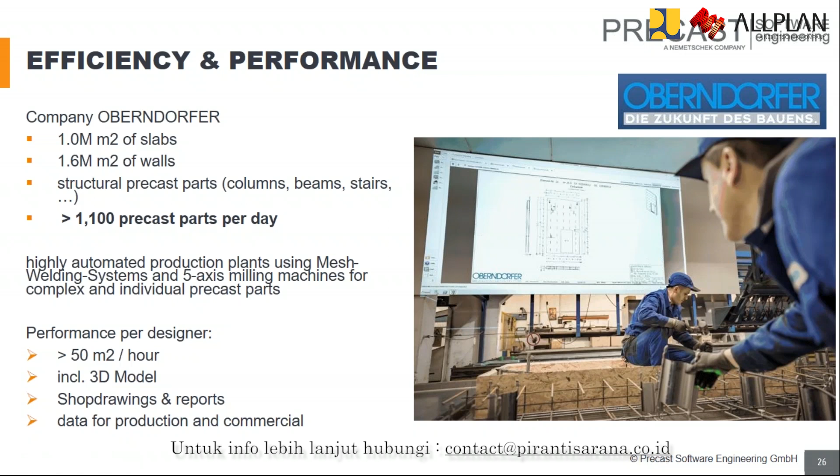And as you can see from this number, 50 square meters per hour for precast shop drawings produced, including 3D models, shop drawings and reports, and also data for production in the automated plants.

So this is actually enabled by our TIM solution, which we will present to you tomorrow. It is an integrated platform.

Compared to our competitor, this is actually a live case. We have 2 factories by different owners, but all the machines have exactly the same layout, almost the same size, producing the same precast parts. But using our software, they can actually achieve maximum production within a short period of 4 to 6 months, including training, configurations, etc.

So we have more than 700 precast customers worldwide, and altogether they deploy about 10,000 workstations, producing 230 million square meters of precast parts per year, spread across the world.

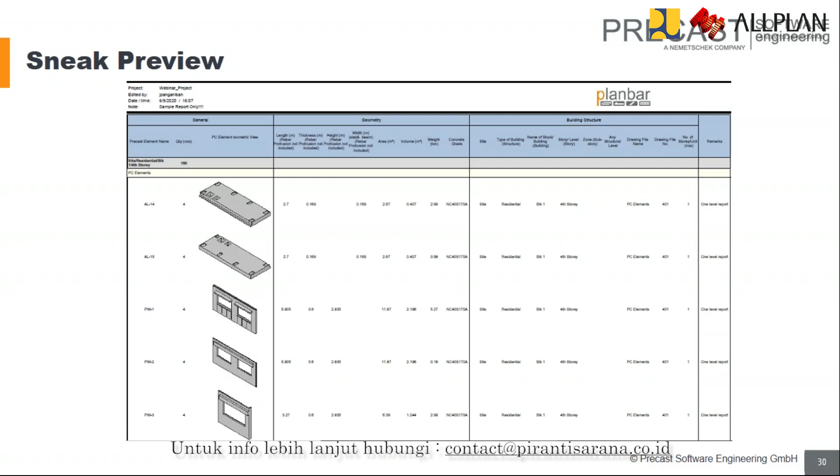And maybe a short sneak preview for tomorrow. So today we explained the precast workflow, but tomorrow we will show you more on the reporting, how you can report. This is very important if you work in a company whereby you want accurate invoice generation, for example, and you want to create these reports so that your management can see how much concrete or how much rebar you are using for this project, for example. And we will also be talking about this TIM platform that I've been mentioning, Technical Information and Integration Manager. It's a model-based work preparation platform, with cross-platform integration possible as well, including mobile information management.

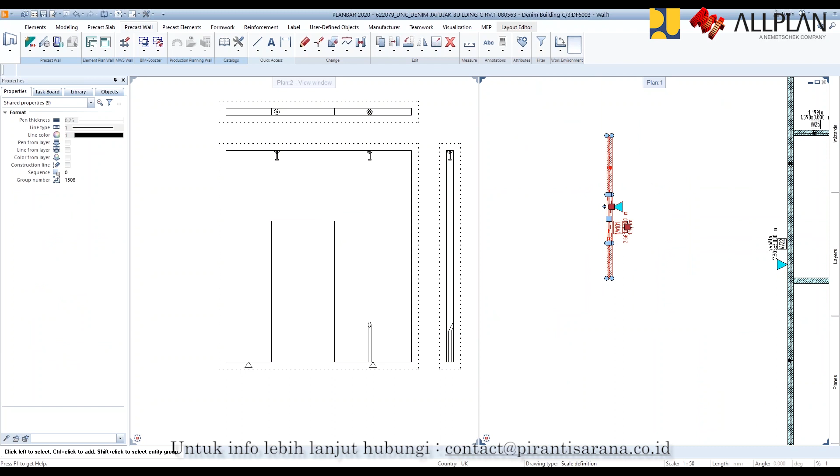Okay, focus on this element. If I redesign it, you can see what happens. The system will automatically reposition your lifting anchor according to your center of gravity.

Sorry, may I jump in? Here you have seen exactly what happened before. If the 3D walls are connecting together, there is a very strict control so that you cannot even extend it. That's very important to mention. Thank you, Yusuf. Because the wall is connected together, you have no possibility to add or merge a new wall into the existing elements, because of the clash between the two walls.

Okay, the second question is about parametric objects. We have PythonParts, we have SmartParts, but if you expect to have a parametric object from PLANBAR, we also have parametric objects for 3D elements.

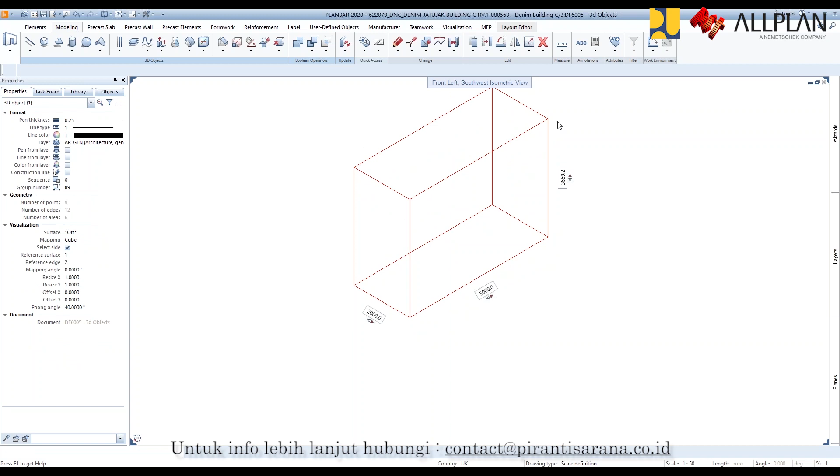Let's say, for example, if I create one box here, and with the block, when I click on that, you can see now there is a temporary dimension. With the temporary dimension, you just key in a new dimension, new size of the width, length, or height of your object, whatever you want. And of course, you can easily handle it as well, depending on you. You can change options if you want to resize by scale or resize by point, depending on you.

And then for the clash check, actually we have a plugin, we call it All Check. With All Check, you can check any objects, any items in the 3D modeling, as you can see on the screen now. You can check architecture elements with engineering, with precast, with reinforcement, with anything that you want to check.

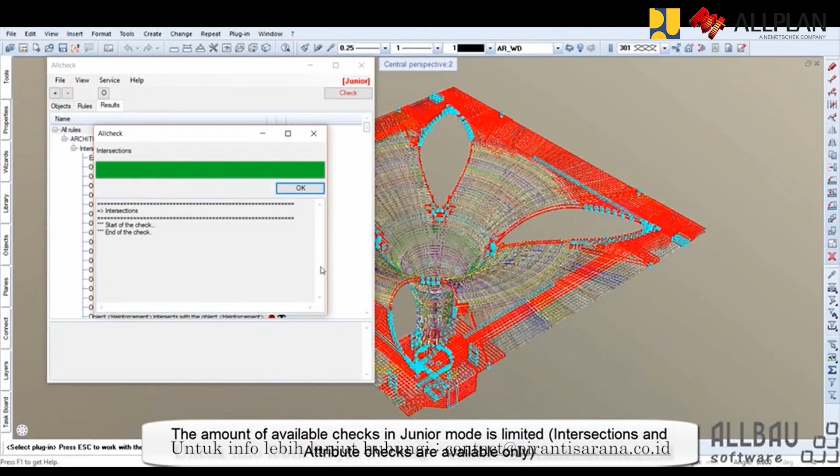But in this video, we show you how to use the rule editor. With the rule editor, you have to define object 1 and object 2 to check what happens. And of course, you can define color and gap between elements, the rule. Then you have the report or result of the checking on each object that clashes together. It will show you a small box or highlight, and you can decide by your own whether to fix this clash or not.

But we also have this feature you can use to check clashes between elements, and this module, this add-on, is free of charge. You can download it by your own, install and use it without any cost. It's for the clash check.

And for the other question, if we want to have a bend bar for some area of your slab, let's say, for example, I need to have a bend bar for 1, 2, or 3 bars from this side. So how can I do it? I just make the support separation, then go to bend bar, 25 centimeters, and okay, now we get the bend bar. Oh sorry, I made 4 bars to have the bend bar.

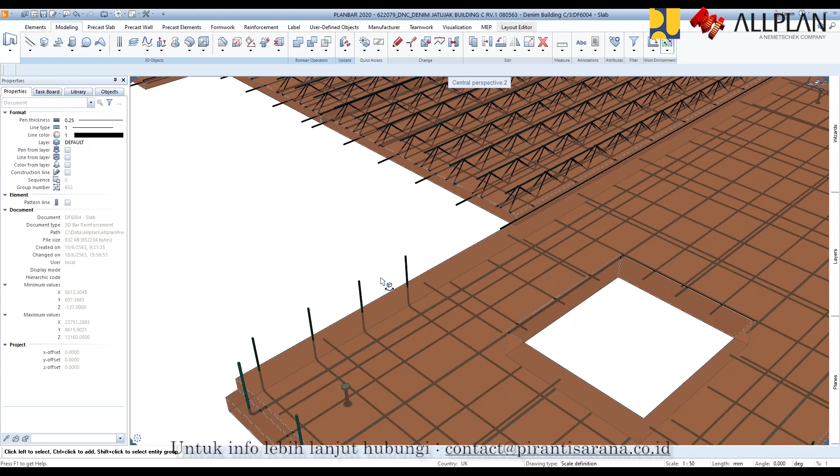Okay, you can move it. Sorry. If you want, you can delete and create new ones again, but I will not create it again, I'll just show you what happened after I delete it. So you can have some bar to bend if you want on each side of your slab, or even wall.

Okay, that's all from my side for Q&A. Next.